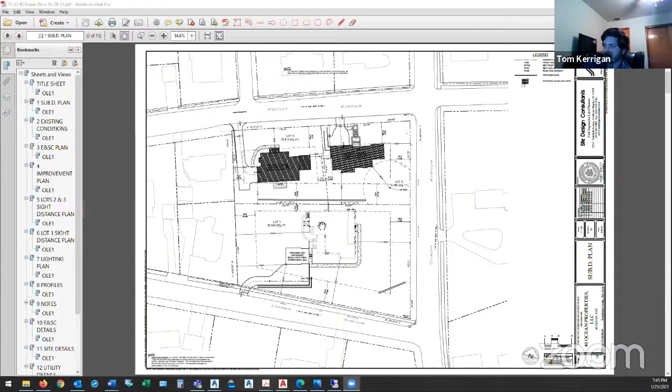As you can see, all of the setbacks for each of the lots are provided. This is the existing conditions of the property. The existing driveway and the existing garage are proposed to be removed so that we can construct the houses on lots 2 and 3, which are the 2 new residences. Lot 2, which is this lot here, will utilize the existing driveway access point that comes off Walnut Avenue.

As you can see, we've provided an erosion sediment control plan that extensively addresses any concerns of runoff leaving the site. There is silt fencing shown down slope of all disturbances. Construction entrances are provided for each lot. And all stockpiles are shown to be stabilized.

As I mentioned earlier, there is currently no stormwater for the existing residence or any of the impervious areas on 40 Ocean Avenue. We are now providing for each of the new residences stormwater management practices, and for the new garage and the new driveway, a stormwater management basin down near the intersection of Linden and Ocean Avenue.

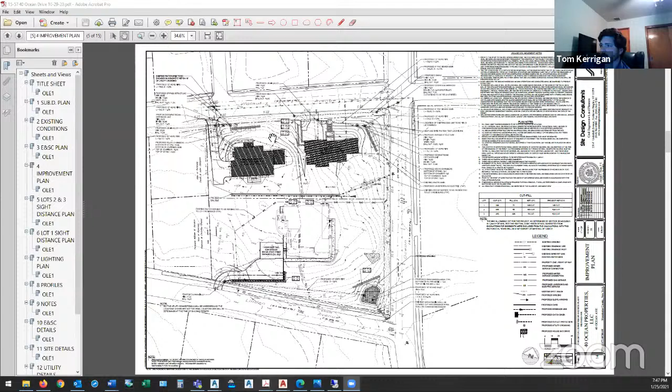We have done, to the best of our ability and due to the limitations of the code, reduced the amount of grading required for this site. As you can see, we limited the grading within this 40-foot radius of this beech tree to make sure that the roots were not disturbed as a result of the project. And also tried to reduce the amount of cut and fill necessary for the project. We currently meet the requirements of the code for this.

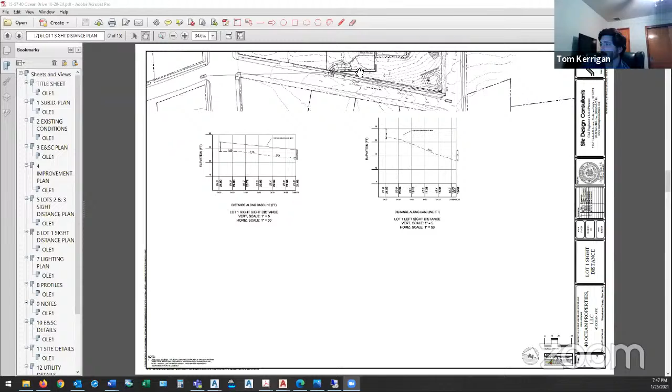Adequate sight distances are provided along Walnut Avenue for lots 1 and 2, as well as along Linden Avenue for lot 1 at the new proposed driveway access point. I noticed quite a few gradient lines on your plans. What does each line represent on that? 1 foot or 2 feet or what? 1 foot. It was requested of us by the village consulting engineer that we show it at this level of detail.

Okay, and your mains, I assume your electrical is going to be buried, and where do you propose to bring your utilities into the houses, the two new houses? So for the sewer for lots 2 and 3, we will be constructing an extension of the sewer that comes up along the right of way along Walnut Avenue, and it will tie into the existing sewer main located in Ocean Avenue. The water services will be pulled from the water main in Walnut Avenue and the water main in Ocean Avenue.

And as you say, electric will be coming off of utility poles and run underground to the proposed residences. We'll also be relocating the water service for the existing house. Currently, it comes off of Ocean, almost directly underneath the beech tree, and into the side of the building over here. We will be utilizing an existing connection off of Linden and connecting it around the side of the property to the same meter point. Presumably you will just abandon the service line that runs under the tree then, rather than trying to dig that up. Exactly, yes.

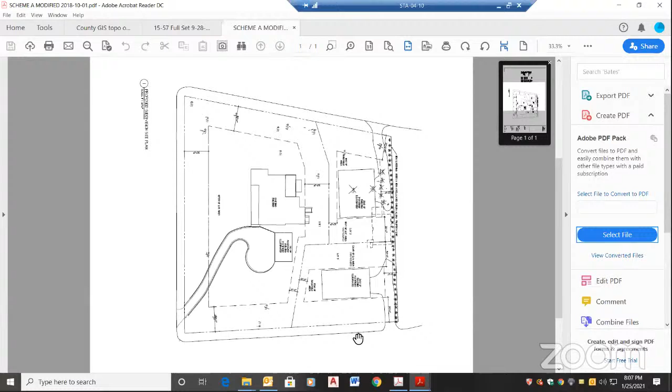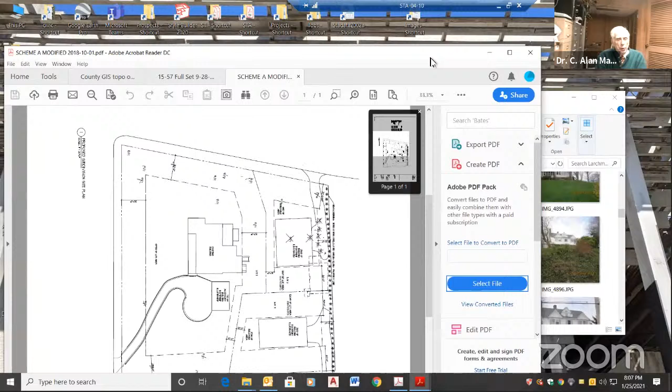Well, thank you. We appreciate that. And unless, Liz, do we have anyone else? Then I think what we probably should do is close this portion of the hearing tonight, and we'll work on our letter to the planning board. Mr. Chairman, I would love the opportunity to respond. I think a number of the things that were said are not correct or misleading. We'll be happy to hear the applicant, but once again, I've asked him to be brief. Sure.

We did see a version of these plans when there were negotiations going on. They were analyzed for zoning compliance with our engineer, and there were all kinds of problems. Number two, preserving a house like this and hoping it to have value and to sell it so that this remains a viable development in the future. No one's going to buy this house with another home in the backyard. This plan makes no sense at all. The other plan gives it room, leaves it to breathe. Number three, we are going to the Architectural Review Board. We're going, as you know, for site plan approval.

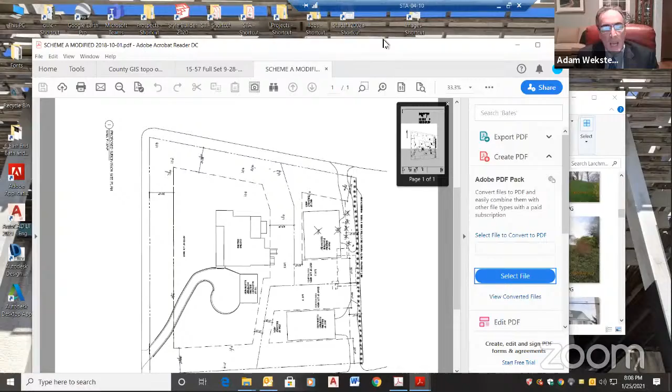I don't believe that the neighbors on Walnut, who are the ones who are, to use the technical legal term, making the most noise, have the ability to say, we don't want two houses on our street, we want them elsewhere because that's what we want. We're showing it doesn't interfere with the views. Mr. Tilley quoted a policy in your local waterfront revitalization plan in a way that was completely misleading. What your plan says under policy 25 is that the views should be preserved from the end of Walnut and Bay Street. That's all the way over by the water on the other side of Ocean Avenue. We're not talking about houses that are across the street from us on Walnut. And you can read that yourself.

The tree. I don't know to what extent you want to go into that, but both the Preserve Larchmont's expert and the expert for the town told us they wanted to see a bunch of preservation measures. We have agreed to do all of them, and there are conceptual plans that have been submitted to that effect. But we haven't even gotten a negative declaration or gone to the zoning board for variances we need. So we're nowhere near getting an approval for the subdivision yet. I do think that the board already has what it needs, but to the extent it has an issue, we will submit them and we'll comply with all the recommendations that in fact have been made.

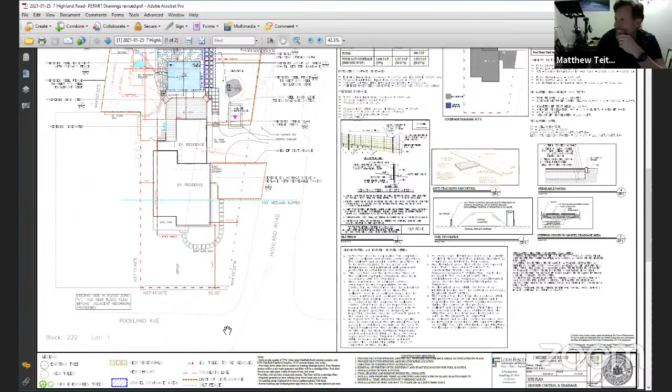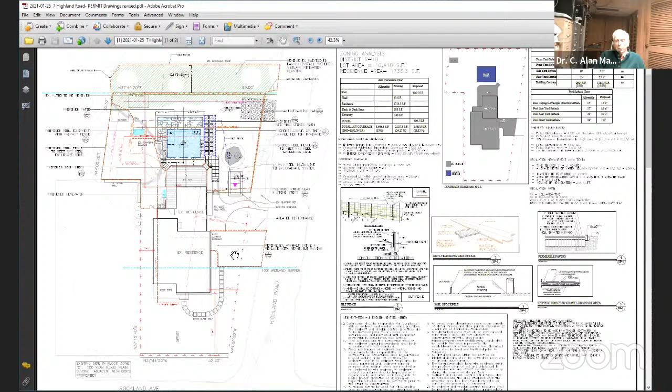Yes, and as mentioned, we're mitigating the stormwater in this area by removing and replacing the asphalt driveway with permeable paving. And so we are coming up with a net decrease in impervious surface. Okay, we will attach this. Do you have anything with the planning board? Are you on their schedule this next meeting? Yes, we are on their February meeting, and we'll be presenting this application to them. So any comments or feedback you do have would be greatly appreciated prior to that meeting. It sounds, generally speaking, that the scope looks okay, with discussion on plant material with Liz.

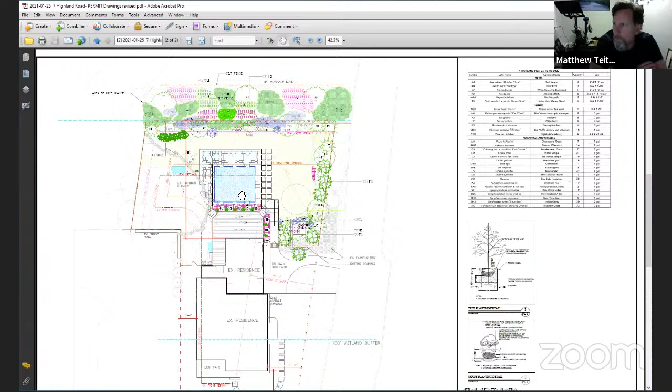Just looking at the plan, looks like there's a rock ledge cutting across the corner of the pool closest to the house. Yep. What's the plan to deal with that? We have a shallow pool. The full depth is 5 feet, so we're about 3 feet less than a typical pool at 8, and so that is hopefully helping. Due to the grades in this area, this will be lifted as well. We've done some initial probes, with the low end being on the ledge side and the deep end of 5 feet being a little farther away. So we're hoping for the best, and we'll adjust and accommodate as necessary. Okay, but it's small potatoes, relatively speaking, because you're lifting it and it's a shallow pool. Exactly.

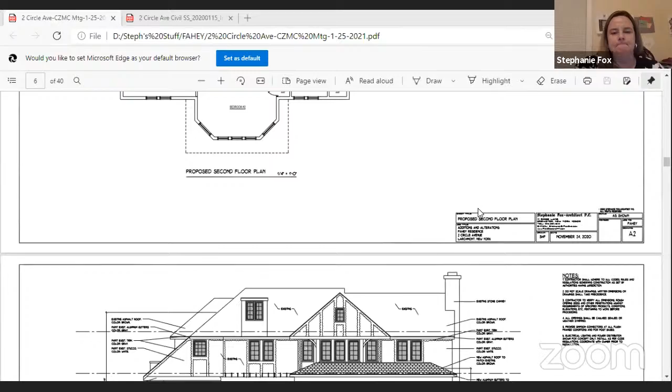Some things to note is that we have a full stormwater treatment plan in effect that has been reviewed by the village engineering consultant, and we have made modifications to the stormwater plan based on some comments from the engineering consultant. And as of last week, all of the comments have been addressed, and there's no further comment from the engineering

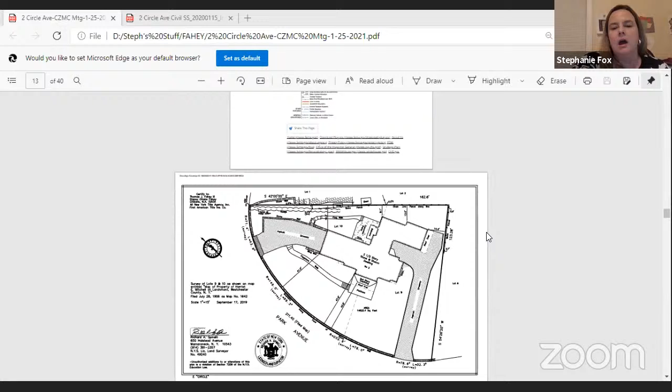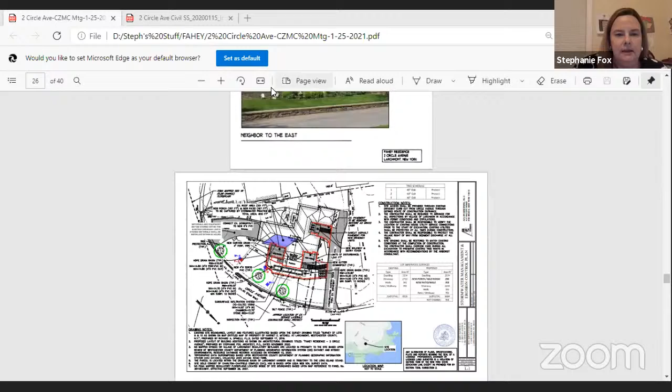consultant. It should be noted that of the new areas being added, only 358 square feet of new impervious area are going to be added, and it will be 100% mitigated with the stormwater system that we are proposing. What is the stormwater system that you're proposing? It's going to be four 100 HD, hang on, I can zoom in, Cultec units. Now the 100 HD Cultec units are the lowest profile units.

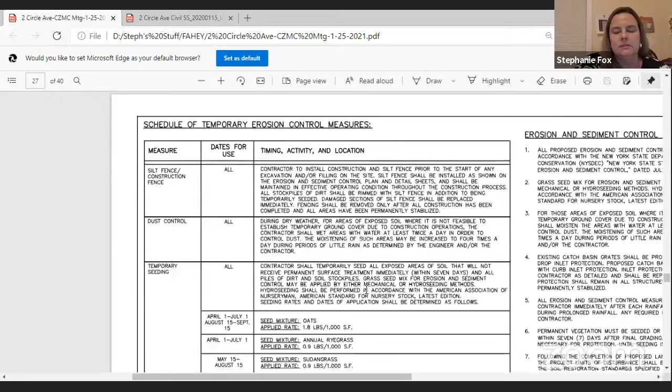So here's the engineering site plan. Here we have the front of the home, and there's going to be the four units here. One of the comments from the engineering consultant was a concern about the units' proximity to the existing trees that we have here. As a result, we had an arborist come out and take a look at the property. He did make some suggestions as to doing some pneumatic excavating for the roots, but, this is the report from the arborist, he did not think that any of the installation of the stormwater system or the proposed structures were going to have any impact on those 3 existing trees.

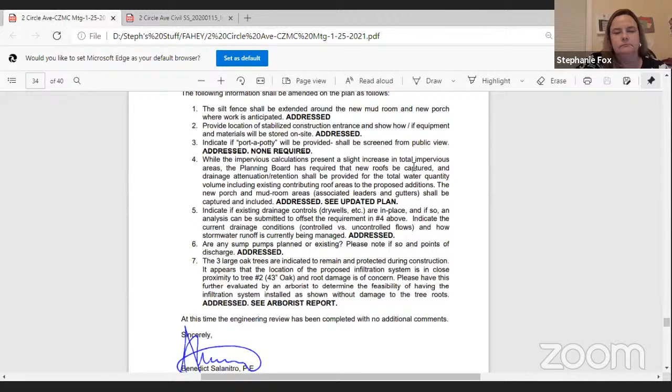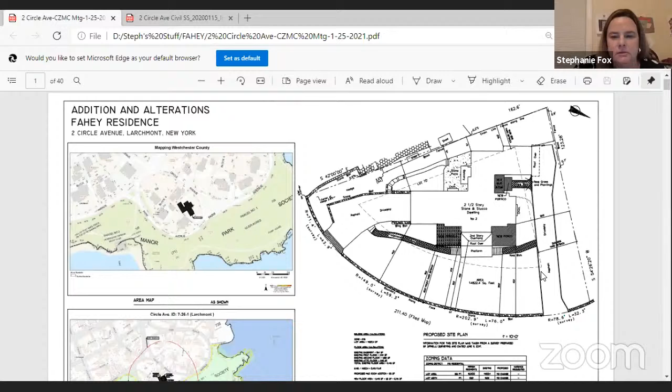And just so you can see, there were no comments other than engineering comments from the planning board. This is just the memo that shows that all items have been addressed. And I'll go back up. Mr. Salanitro is not here tonight? No, he's a consultant to the planning board. Oh, okay. Yeah, he's the engineer. We had our own separate engineer prepare stormwater mitigation plans, and Mr. Salanitro is the consultant to the planning board who reviews the engineering plans we submitted for the stormwater mitigation. Okay.

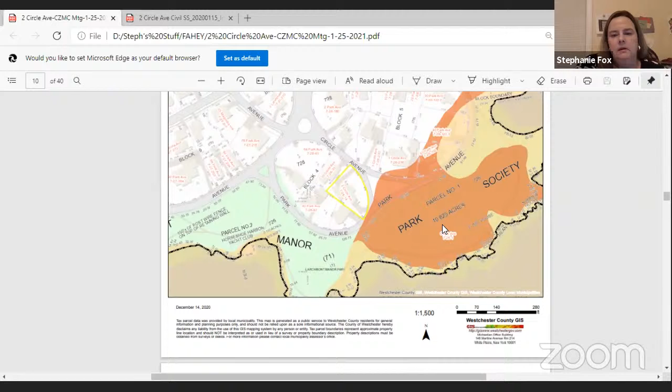Go ahead. Just a couple of other quick things to note. Let me scroll quickly, so I apologize if I'm making you dizzy. Here we have the flood zone map. This yellow triangle-type property is Two Circle Avenue, and you can see that we're beyond the flood stage or the hurricane stage map here. Same goes for the FEMA map. You can see we are in Zone X. We're not in any flood zone whatsoever, although there is proximity, obviously, to the coast.

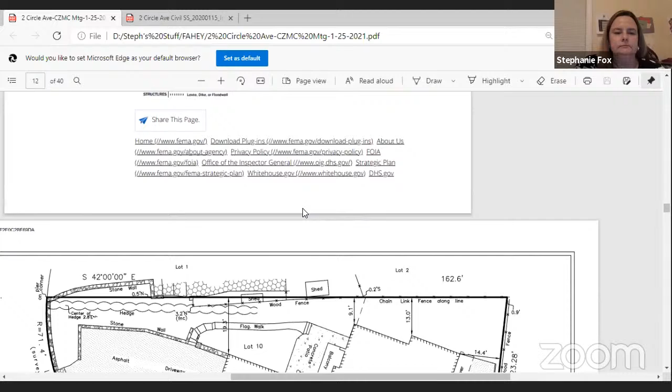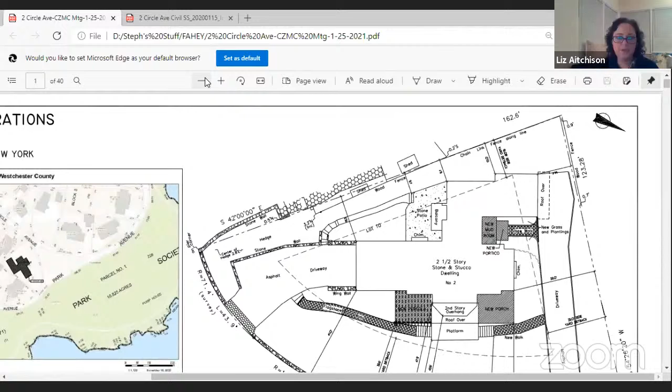Liz, do we have all of these plans submitted? Do we have copies of all of this? Yes, we do. Okay. Anyone else have anything they want to say? Anyone want to speak up on this? No? Okay. All right. Thank you.

I just wanted to say that we too will be in front of the planning board for the February meeting. So if you could find time in your agenda to make your recommendations prior to that meeting so that we can move forward with the review process. All other items have been addressed, and the CZMC review was the only outstanding item for our planning board review. Yeah, that's going to be tight. But we understand your situation. Okay, thank you.

I'm sorry, but we're not the February 1st meeting. You realize that 40 Ocean has a special meeting on February 1st. You're the regular meeting? Yes, we're the regular meeting, which is February 16th. That should be doable. Thank you. I'm glad you clarified that. Okay, thank you.

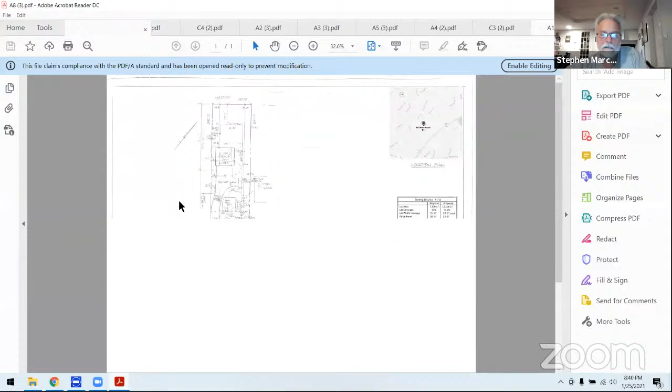Your computer looks as cluttered as mine. Yeah, I'm a little, oh, there we go. You see that? Yep. Oh, good. I always manage to screw it up. Okay, let me find the right page.

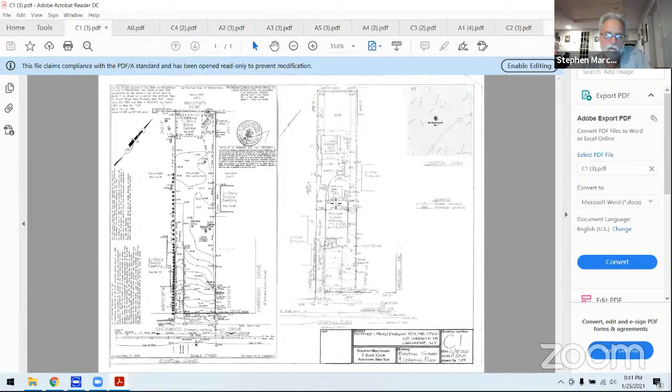Okay, this is it. We have an existing lot that has an existing garage and an existing driveway. We're proposing to remove the existing garage and have a one-family residence and a detached two-car garage here. When you say you have a garage and a driveway, am I to understand that that means there's no house there? Correct. Okay.

Could you explain why you have a garage and a driveway but no house? I can't, other than it was there for quite a while. Yeah, I was hoping to get a clarification on that because I'm aware of the lot. Okay, what's your plan? Okay, let me find the next.

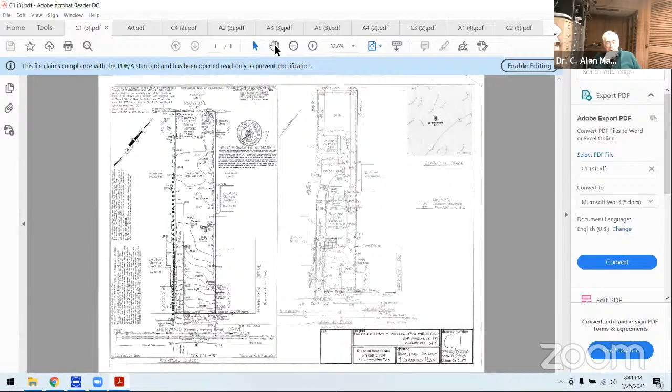Okay, so we had a perc test done. We had an engineer do our stormwater management to contain the water on the site. We're also going to add some pervious surface at the end of the existing driveway to help mitigate that runoff from the existing driveway. Also,

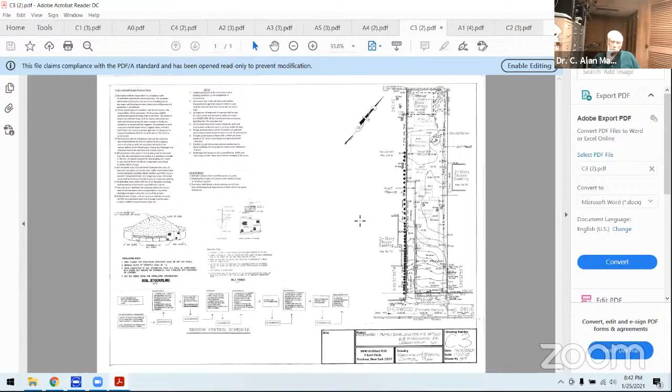Is this lot kind of unusual in shape? Is it a very long, narrow lot, or what's the story? Yeah, it's an existing non-conforming lot in terms of the size of it, the width. And what's your coverage going to be? We're going to meet the zoning, the coverage, which will be, I'll tell you in a second. 35% is the coverage.

We're at 34.4. That was part of the reason we got rid of the existing garage, because trying to keep the garage and extend the driveway put us way over the coverage. So we eliminated that and put a new detached garage, which is also smaller than the existing garage, to make that work.

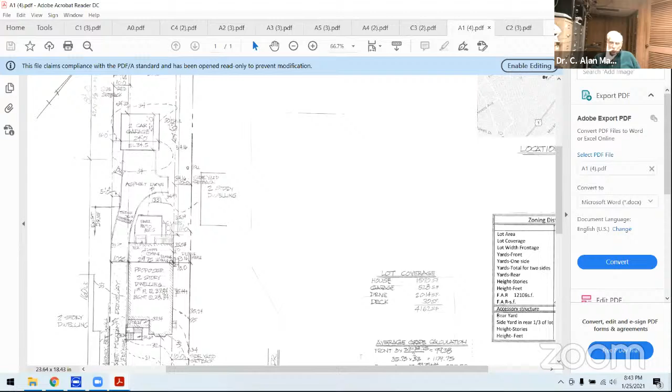And the architecture on this is what? I mean, it looks like a railroad flat, actually. It's, hold on, that's the wrong one. That's the site. Yeah, this is the front of the house here. We have a little porch in the front here, steps down to the driveway. That's the back of the house. So presumably the one on the left is the front and the other one is the back? Correct. Yep. And the sides, okay.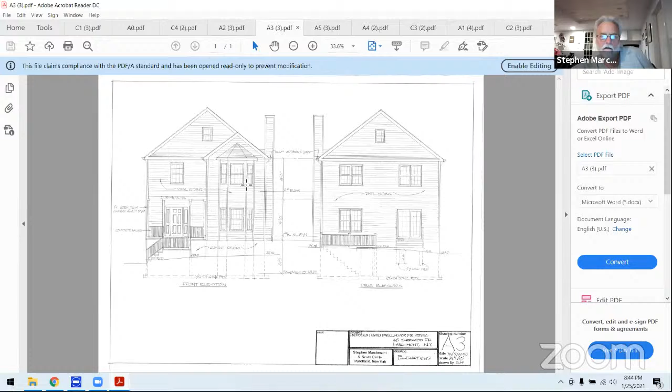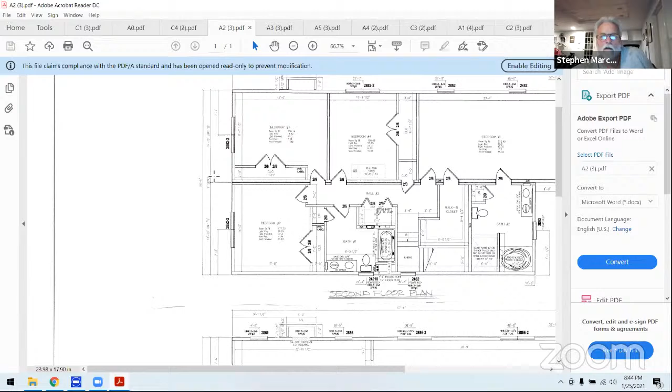And what is the bedrooms, bathrooms, et cetera? Yeah, over here. It's a 4-bedroom house and 2.5 bath. No problems getting hookups and all that from Con Edison? No, the water is existing, and there's an existing valve in the curb. And we have, how about gas?

Gas, I'm not sure about, to be honest with you. I know it had a moratorium. I don't think there's gas on the site right now anyway. All right, so you're digging in and hoping for the best on all of that. I get you. Right. Well, there is gas in the street. The question is whether we can hook up or not. Yeah, I understand.

Liz, is there anything as far as plantings or anything we're concerned about here? Well, I'd asked the applicant to add tree protection to the plan for a large tree in the back quarter or third of the lot. Oh, yeah, here. Yes. Right, tree protection. What's the condition of the trees? Looked in pretty decent shape. I didn't really evaluate it, but it's not shedding at this point, huh? No. Okay. All right.

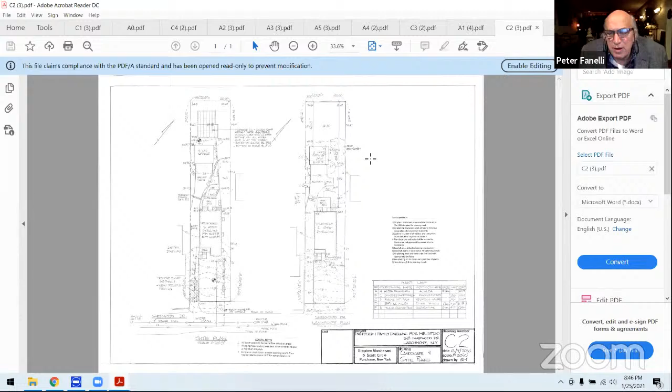Stephen, quick question. Any issues with flooding? No, it's high and it slopes to the front of the property. So I have a question. You have all the Cultecs in the back of the property. What kind of stormwater are they collecting, considering the slope? Well, they're collecting the house, the garage, and the new driveway.

Okay, because I don't know if you noticed, but the driveway that's right in front of your driveway is being raised. Which one? The house right in front of yours. Oh, across the street, you mean? Yes. So I would suggest that maybe there is a better way to catch the water coming down from the driveway. The house next door, I believe is 72 or 70, has a very long driveway. And when it rains, you can see the water coming down.

Right. The concern is that you don't want to impact the house across the street. Right. Well, I think that's why the town engineer consultant recommended that we put a pervious pavement at the end of the driveway to help mitigate that, which we incorporated here. The concern is the maintenance of those pervious pavers, right? They're efficient for a few years, but they tend to clog. And after that's clogged, there's no maintenance.

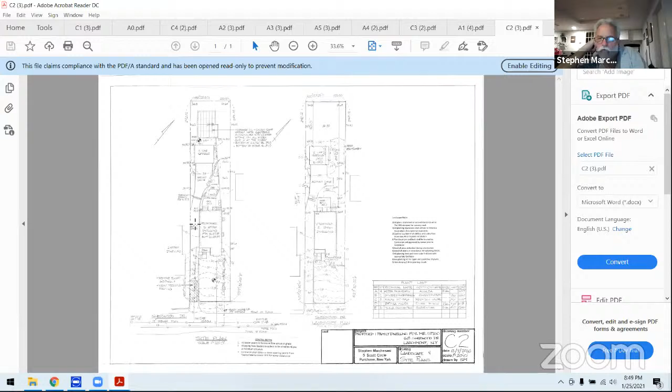Maybe some of that water, there's a catch basin right across from the street, maybe. Something to think about. Right. Yeah, that's a question if the town allows us to do that, and I'm not sure. Yeah. Occasionally you see it, sometimes you don't. Yeah, right. I'd have to find that for you. Yeah, you'd have to find out on that. And also if it's on the other side of the street, then you've got to open the street up, because you can't just dump it in the street and let it flow across. Otherwise it'll freeze in the wintertime.

Right. This street dead ends to a low point too, right? I don't know if it dead ends at a low point. It's running downhill. Where Staples is. I'm sorry, say it again. At the very end of that street, we're over by the Staples over there and behind the car wash. And if I recall, the end of that street is a low point, right? Everything else around it is much higher. Higher, yes. I'm not sure about the runoff or how the sewers collect over there or where they ultimately feed to. Obviously, the storm drains just go right to the Sound.

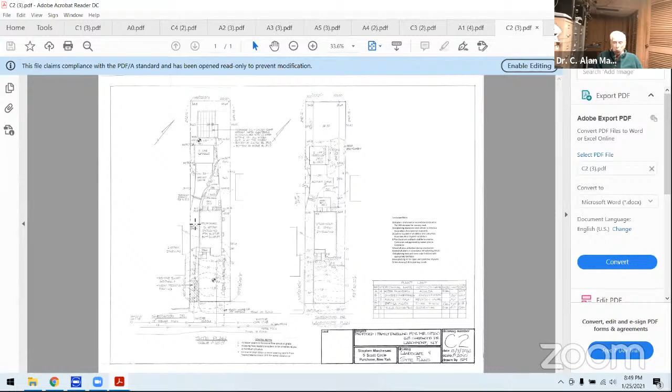Right. Well, strangely there is some form of a drainage, cut drain, whatever you want to call it, in the back of the property. I haven't figured out what that does, but it's in the back of the lot, right behind your garage, right? Yes, right. That's where the Cultec would be located. So 16 of those 100s. Right, the shallower ones. Now, I was just wondering if you could maybe distribute the Cultec so that you can redirect some of the flow from the driveway, from the front, into those Cultec. Right. Well, we're basically catching anything new, and the existing driveway is the part that's running towards the street.

So you're reducing runoff from the site, you're saying? Well, we're trying to help mitigate a little bit by doing some pervious surface at the end, to collect some of the existing driveway, which right now just runs down the street. Right. Just looking at the property, from the street to the front of the property there's a decent little grade to it. But after that, does the property level out? Yeah, it's pretty flat on top. Okay. That's what I was just looking at.

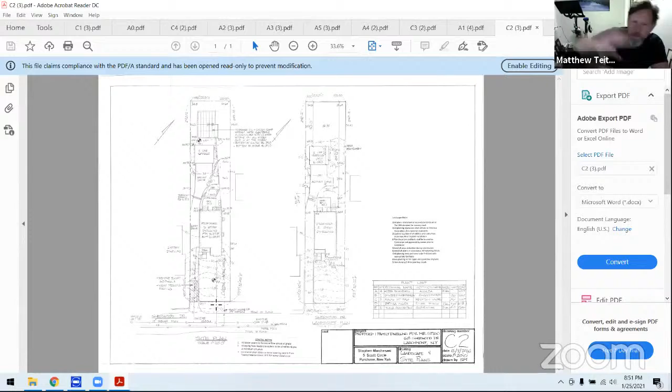We were thinking of a steeper hill, because when you look at the images from the street, it's all wood and you can't really see much. But after the front of the property, it looks like the front of the house is at about 33 feet, and the back of the property is at 34 feet. Correct. So, Mauricio, to your question about the Cultec, I could see how they could work back there. Right. From the front of the house to the street is the steep part of the lot, and that's pretty level in here. You have a retaining wall that keeps the property flat, a retaining wall across the front and up the driveway.

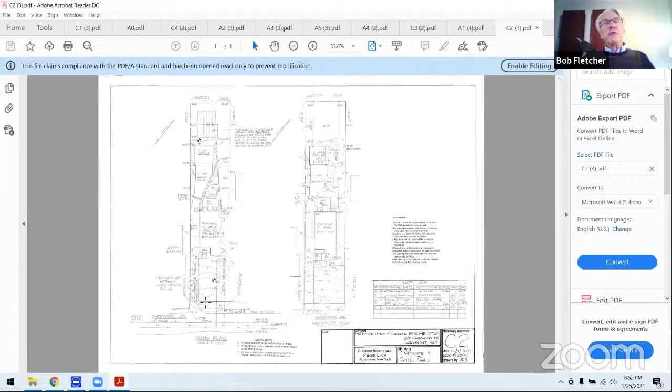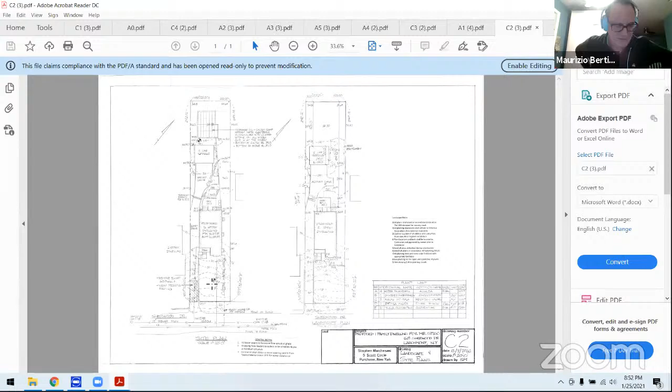Wouldn't it be practical to cut a drain across the driveway near the street and direct that water to a Cultec unit that could be placed there? Well, the problem is when they did the test pit, there was ledge right there, only approximately 2 feet down. So you really can't get it in. You're gonna have a lot of rock there. Oh yeah. Okay, thank you. And just by experience, I know that the house next door gets water in the basement. So maybe you want to put a little bit more than those sumps in your basement. Right.

Okay, thank you. Appreciate it. And will you be at the later February meeting at the planning board? The 16th. Yeah. Do you need any variance for the lot? No? So you're good? Yeah, we meet all the zoning. Excellent. Okay, thank you very much. Appreciate your submissions. And we should be able to deal with that for the 16th. I appreciate it. Okay, thanks.

The last item on the agenda is 151 Rockingstone Avenue, Town of Mamaroneck, a new single-family house. Liz, would you promote the people involved, if you would? Yep. Eliot.

Eliot Senor. Mr. Senor, we don't see you. We only see your name. No, sorry. My video's not working. I don't know why. Have you got it turned on? Start video. Let's try that. There we go. There you go. Now we see. Good evening. Sorry for the late night. I guess you've been here for a while.

So what we have here is a proposed building on an existing lot at 151 Rockingstone. We're on the corner of, let me share my screen, I guess. Can I share? That's a demolition, am I correct? It's a demo of an existing house, yes. Okay. Let's increase this so I can see what I'm doing. Share. All right, if you could see this, this is the house. It's sort of surrounded on 3 sides by streets. We have Mountain Avenue, Rockingstone Avenue, and Wildwood Road here. We have an area map down in the corner.

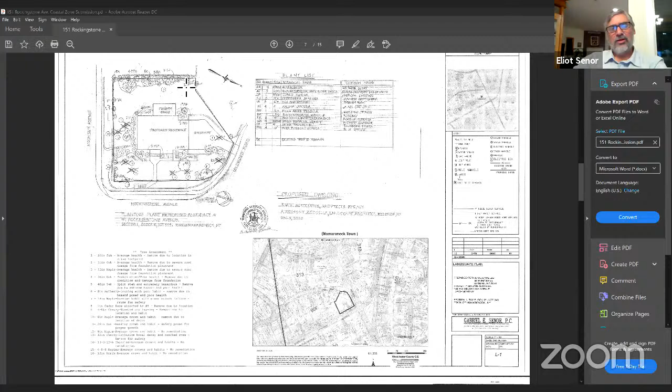This is a copy of the landscape plan that's provided by Anthony Acasella, and has quite a few additional plantings that we're doing in the property line between the neighbor's house and ours. We are providing a drainage system as required, underground Cultec in this area here, as well as some in this area here, Cultec, in this area for the driveway, mostly for the driveway. This is for the house. Right now, it's on top of a hill.

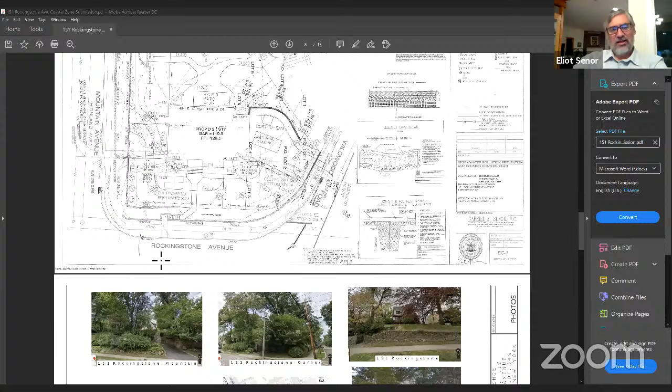This is our property here. This is the driveway off of Mountain Avenue. There is currently a tall wall. This is the neighboring property to the left on Mountain Avenue. It's a tall wall. It's in the right of way. And this is our corner. This is our driveway that we're going to be blocking back in and not using, so we're not backing out onto Rockingstone. Let's see, we have some other pictures here. This is the property across the street. It's a relatively new house on the corner of Wildwood and Rockingstone. And then this is on Chatsworth.

So if you were referring to photographs, they weren't showing up on my screen. Oh, all right. Yes, I was referring to photographs. It's the same PDF. So I was seeing them. No. Maybe you could scroll down or something. All right. Well, here is the existing house. Can you see that now? The driveway off of Mountain Avenue. No, I just see a plan. EC1 is what I see. Yeah, Eliot, it's updating for me. So I'm seeing everything you're referring to, all the pictures around the house. Yeah, I'm seeing it too. Okay. So then ignore my problem. Some computers are a little slower than others. I will leave this up here for a minute.

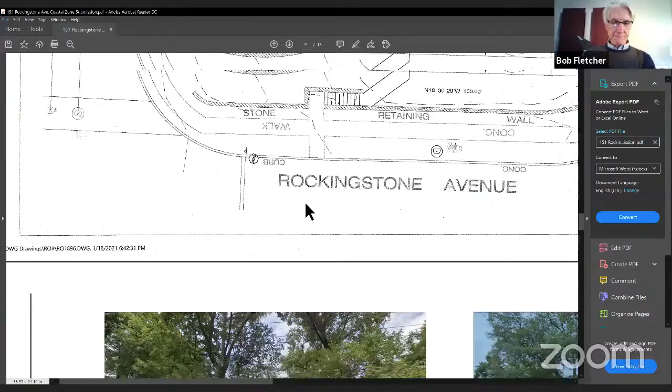So Elliot, as I said, we had an arborist look at all the trees on site, and we're saving the ones that Alyssa suggested to save as much as we can, and are taking down the ones that, in addition to others, one that she had suggested we look at and take down because it's in decay. You got a lot of stonework there. Is any of that being preserved? Or you're knocking that all down? No, all of the stonework around the entire property is being preserved. Let me go to my sketch here.

So right now there's a tiered retaining wall on Mountain, which is remaining. There is a double tiered wall on Rockingstone that's remaining. The area where the existing driveway is, we're going to block that in and match the existing. And then there's a small portion on Wildwood where our new driveway is going to go, which is the only wall that's going to come out, and that's maybe a foot or two high at that side.

Why do you want to move the driveway from Mountain to Wildwood? Well, the current driveway is very narrow, and it backs out right at the corner of Rockingstone and Mountain. And so we think that it's dangerous. By moving it off onto the less traveled roadway and farther from Rockingstone, we feel it's a better position.

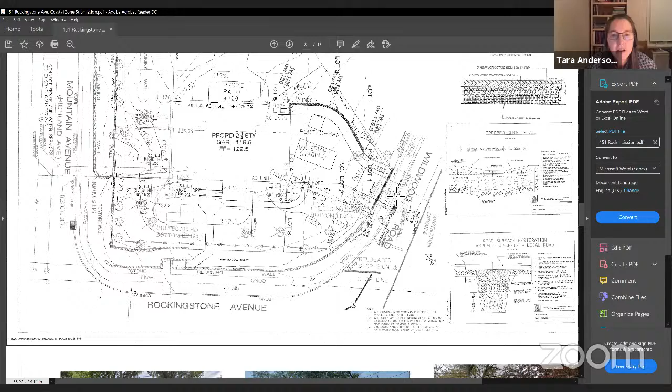It's very close to the neighboring house on Wildwood. The house on Wildwood is actually very far up the hill. Let's see. Oh, so that's just the line? Yeah, that's just the property line. The house is actually way up the hill, way back here. No, I mean the house on Wildwood. That's Mountain up that side. I mean the house on Wildwood. Let me go to this.

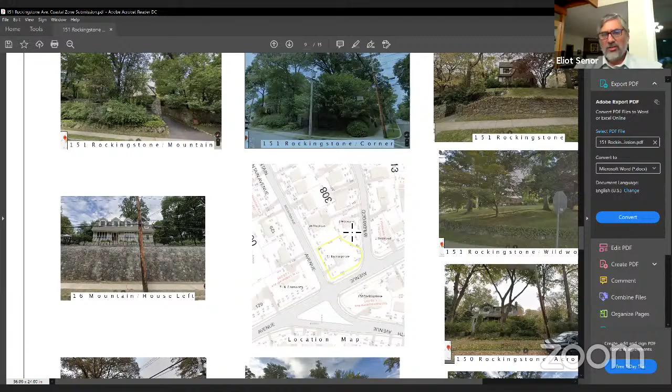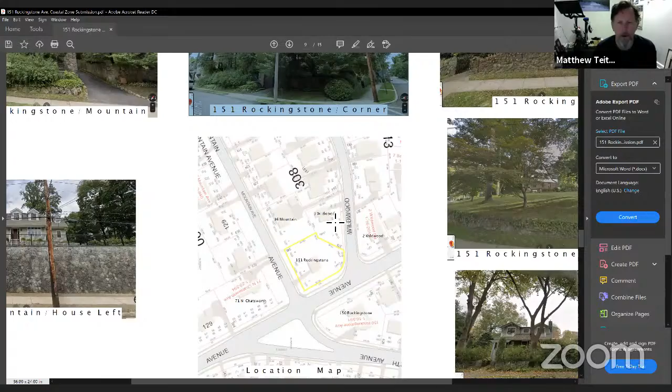So the house on Wildwood is here, can you see that area map? Yep. So our driveway is coming in here, which is not necessarily close to the house on Wildwood. I see. Yeah, if you look at the Google Street Map view, you see it's pretty wide open. It's pretty far away from the next house up the street on Wildwood. Find the picture of Wildwood. The existing driveway is really narrow. This is the picture of the house on Wildwood. That is our existing house, and our driveway is way to the left of the sidewalk because the line comes down at an angle.

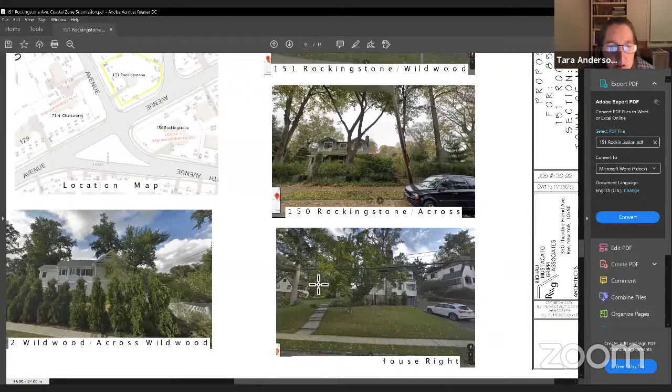So is that tree right there one of the trees to be removed? That large tree? No, that one's not on our property. Oh, okay. We actually have no trees coming down on that piece of dividing line. There's no trees there. There is one down close to the street line, but it's not that one in the picture. And the only tree that's there is not on our property, so we're not taking it down.

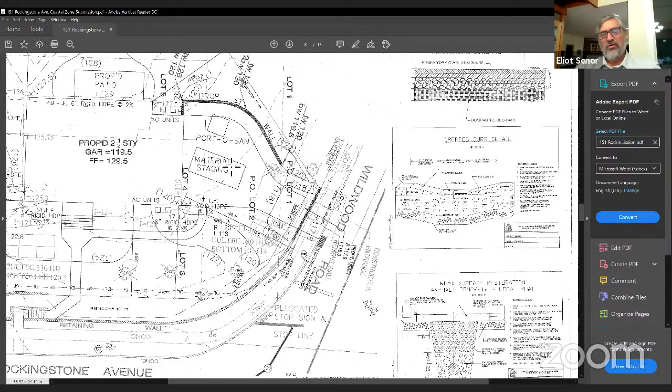It looks like a very sloped property. It is. That's the reason for all of these retaining walls, I suppose, and that's why we're coming in on Wildwood as well, because it's the area that's the least sloped. This is the current driveway, and if we were to put in a two-car garage here underneath the house, we'd have to take out a lot of this vegetation and excavate all the way down to that elevation.

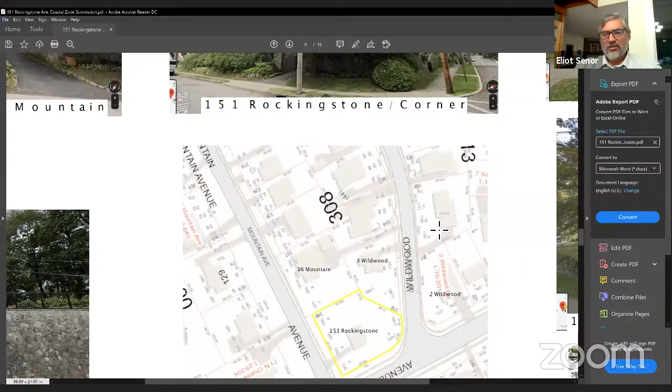By coming in on the other side, let's see. I guess this is the best picture. So this is our existing house. We're going to be coming in a little bit to the right of this picture. And so this is the most gentle slope. The part of the wall that we're going to be taking out is only 2 feet high. The wall on Mountain is a double tiered of probably 8 or 9 feet high altogether. So we felt this was least detrimental to the property as well.

So how many mature trees are being taken out? Let's go to the plan here. So we have 1, 2, 3, 4, 5, 6, 7, 8, 9, 10 trees coming out. Wow, that's a lot. They're not a lot. We're saving all the ones along the boundary line on Mountain, and a couple of existing on the corner of Rockingstone. So that one in the picture from a minute ago remains.

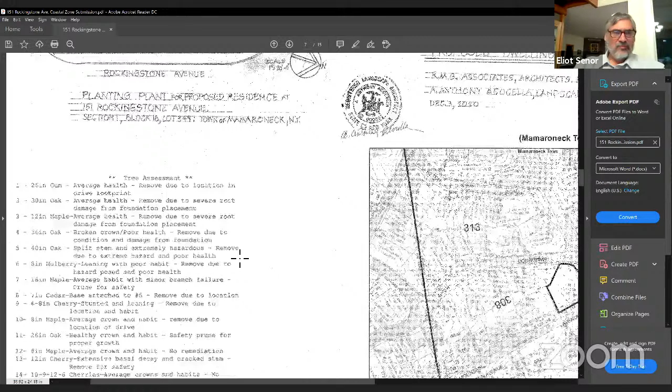So now, as far as the trees that are coming out, you can see what they're like. For instance, number 2, a 30-inch oak, has severe root damage, damage from the foundation placement. Tree number 2 is over here on Rockingstone. Tree number 3 is also severe root damage, I guess, from the proposed house. I'm just reading this. Removed due to extreme hazard and poor health, number 5, which is here in the middle of the lot towards Mountain Avenue.

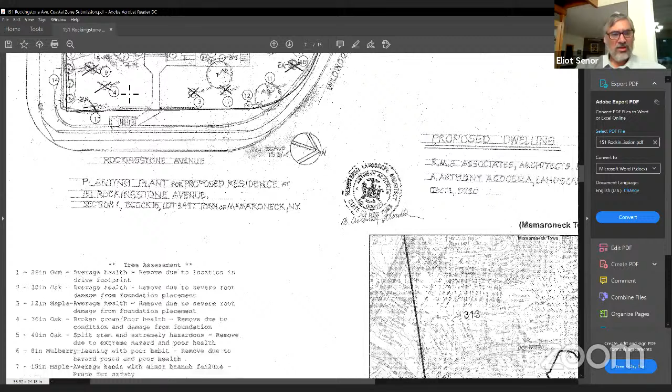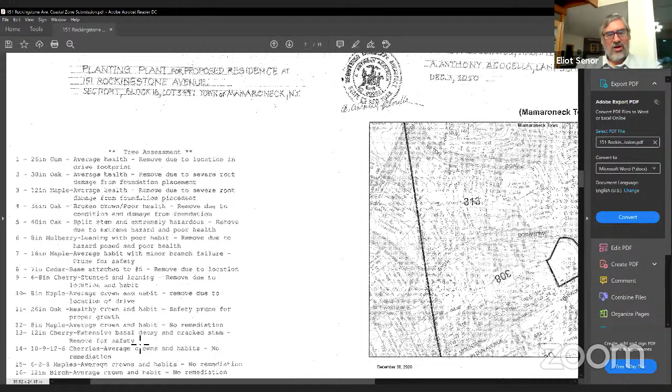Number 6 is hazard posed and poor health. So out of the trees that we're removing, maybe half of them are due to the house placement, and half are not in very good shape. This 26-inch oak needs to be pruned. We're saving it. The 12-inch cherry has basal decay and a cracked stem.

The cherries, average crowns and habits, no remediation. We're saving those. And we're saving these last couple of trees. So out of the trees that we're removing, half of them, I would say, are in poor health.

Yeah, but the plant list on the top, is that the plant to be planted? Yes. So this plant list here is the trees to be planted, yes. Yeah, because most of those are not trees. Most of those are shrubs. Mhm. Right, except I'm not the landscape architect. I leave that to experts. Yeah, I mean, those are mostly shrubs, right, Liz?

Well, you have, okay, the first two are trees. Azalea? No, Acer rubrum. Yeah, oh, okay, the first two, so two maples. First, there are two trees there. There's a dogwood, there's a holly, there's a weeping spruce.

Yeah, but the trees they're removing are, if we go back down to what they're removing, they're really big oak trees and, I mean, Kalmia latifolia, that's just mountain laurel, it's a shrub, rhododendron, that's a shrub, I see a lot of spirea, it's just a little shrub. We also have blue spruce there as well, and holly.

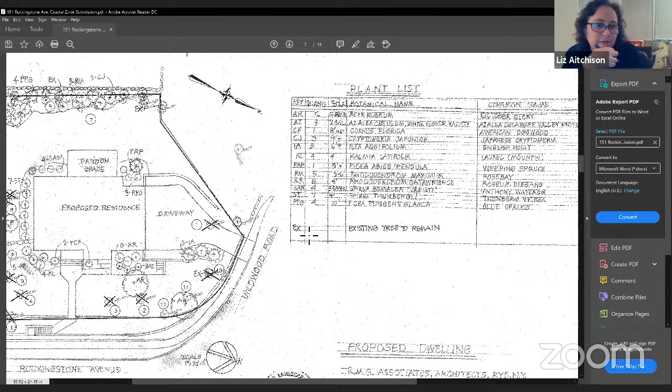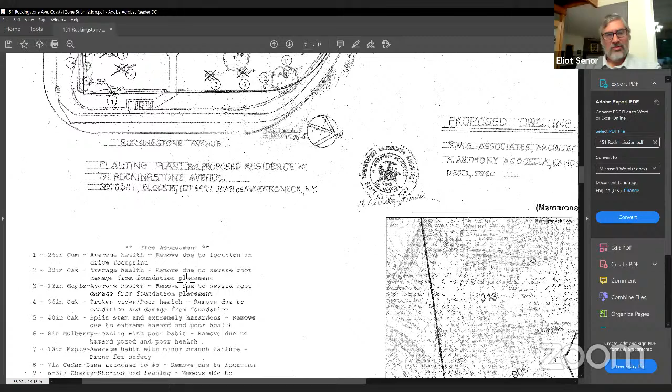Yeah, and Eliot, I thought you were going to try to save number 2 and 3 in the front. 2 and 3 over here. Yeah. I don't remember that. But I mean, we can mark them not to come out, but the arborist said that 2 and 3 were, location in the, severe root damage from the foundation. He feels that they're too close to the foundation. I don't see it. I see it as being far away, but I'm not the arborist, so I relied on what he said.

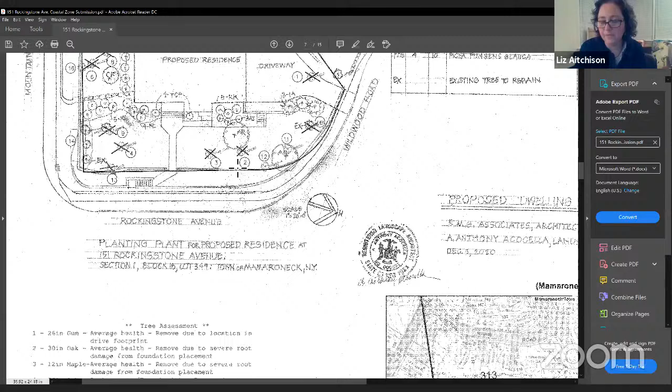Yeah, I don't see that being an issue with those two, but did you go back and revisit these trees with an arborist after the planning board meeting, or is this the assessment? No, we went back, because originally he just looked at the trees that we were taking down, and so we asked him to go back after the planning board meeting to look at all the trees because you had thought some of them, number 13 especially, you thought that they'd come down, and that's his answers for 2 and 3.

Look, if we can save them or show them not to come down, but if they are and have severe damage, then we can remove them later on. But I'm just relying on the arborist's call on that.

Maybe this is an ignorant question, but do people sometimes replace an oak with an oak, because the oaks obviously reach far greater proportions. And so in terms of shading of the neighborhoods, visual impact, you lose a couple large oaks, it's pretty significant. We can request that if we want, that we add some larger trees to the list.

I'm partial to. Is there a good depth of soil on this lot? Because if you encourage a big tree to grow and it doesn't have enough soil to be properly rooted, it's just going to fall over one day.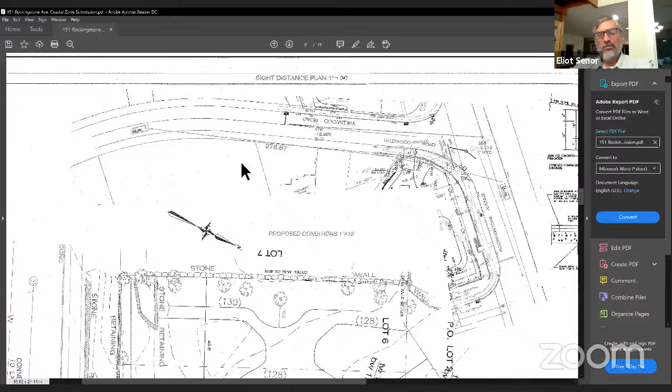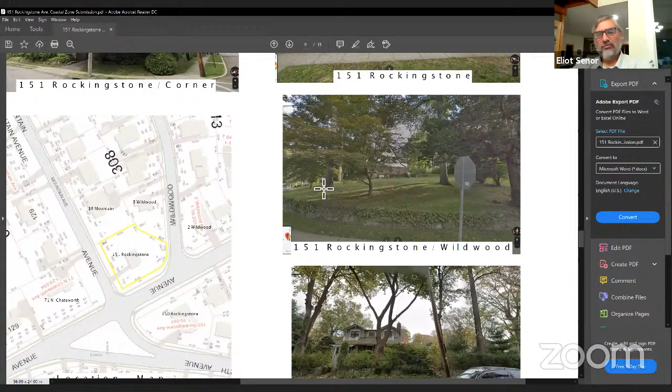you see this area in here where that's one of the oak trees that are coming down, and we can certainly plant something new that would not be damaged at this time from the foundation excavation. Actually, I think it's the tree there that's coming out, that this one's staying. It's this one back here that is coming out. Right. And we can certainly plant some more down closer to the road. What do you think about that, Tara?

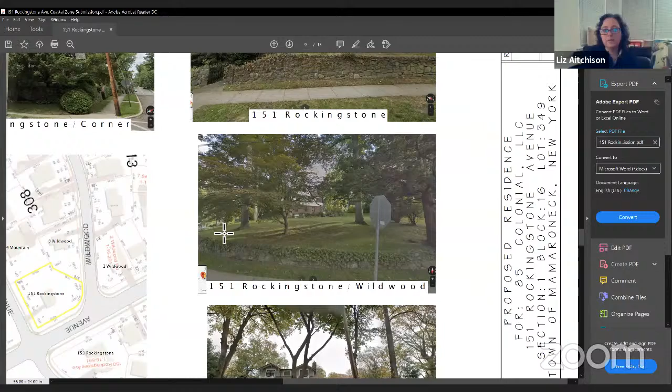Yeah. I mean, I noticed the old plant list and the new plant list, and it just seemed like the old plant list has some pretty significant trees, and the new plant list had some trees, definitely, some maple and a dogwood, but they just don't reach the same stature as some of those original oaks that are there, and so it really impacts the neighborhood in terms of shading and aesthetics. So yes, adding trees like that would be great. Mm-hmm.

Yeah, we don't really have any frontage on Wildwood to add any street trees there. And certainly on Mountain Avenue, we have that high retaining wall and I wouldn't want to add there. But I think we could add something more on the northerly side of Rockingstone. As you go toward the south, toward Mountain, the walls start getting high. But certainly in the area of this 30-inch oak that we're taking down, although we do have these two trees, these ARs, what is that?

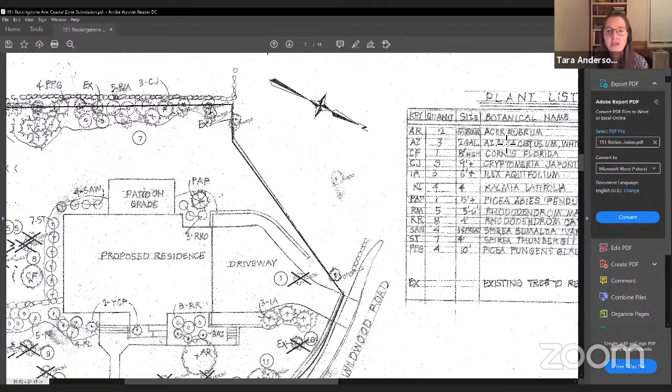Are those the... Those are the red maples. Red maples, yeah. No, I mean, red maples are great. It's just, rhododendron, spirea, it's not really comparable to the trees you're removing. Yeah, I think that the trees that we're planting are more for screening between neighbors and foundation plantings than street trees.

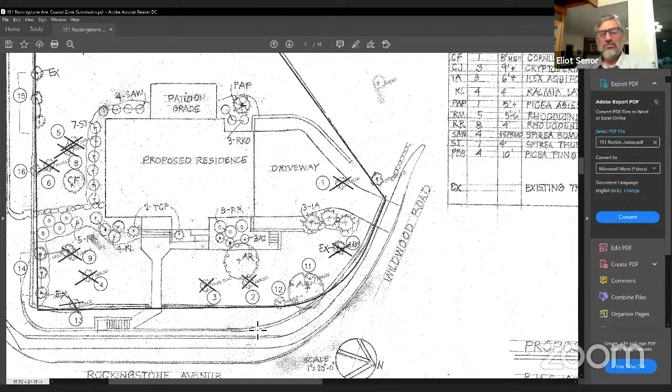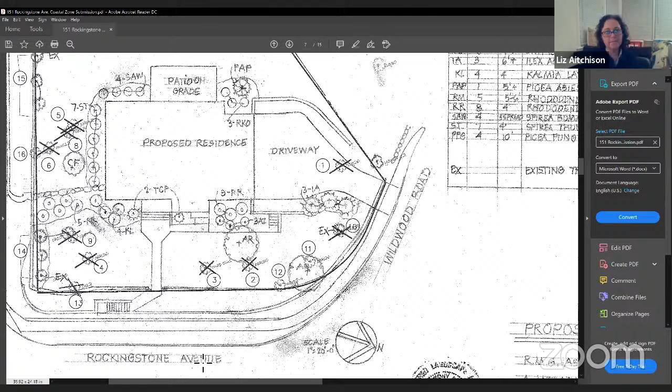So the reason that the town wants to have them take over some of the right of way is so that they'll be responsible for maintaining the retaining walls and the steps that are in the right of way right now. So to make it clear that it's part of that property and not the town's. Right. Oh, I see. So that retaining wall is currently owned by the town? No, it's on town property, but it's built by them. I see. By the original homeowner. Yeah. Original developer, it's hard to say who built these things, way back when the neighborhood was built.

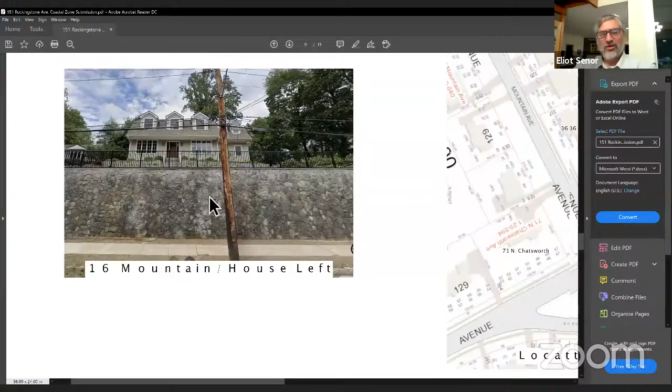But that's what we did with the house next door on Mountain. They had a gigantic retaining wall that they had to build to save their house, basically. Right. Then you see that's that retaining wall that was built, and of course, in order to build or rebuild that retaining wall, they had to take down all of the trees that were up against it because those trees add weight. Again, I don't think we can really do much on the Mountain Avenue side. You're just saying that there's not much room for street trees there? Right.

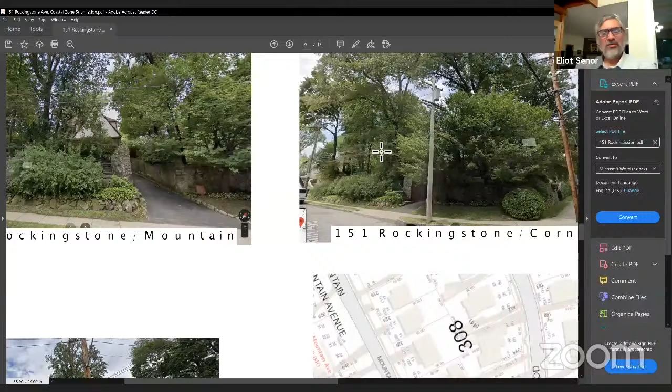This is the view of our property from Mountain Avenue, and all of these trees essentially are staying. I think there's some recommendation that a couple of them come out. Certainly on the corner in here, there was a cherry that is in bad shape, that's dangerous. But most of these other trees on this side are staying. So this is the plan. These three trees here are staying. And then certainly these trees here, there's 3 coming out on that side.

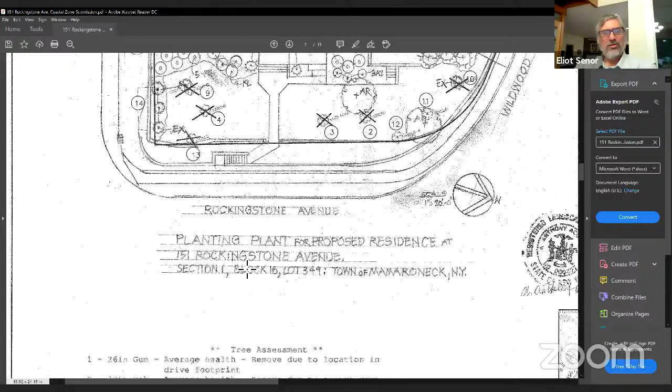Let's see what they have to say about its condition. 9, 4, and 13, or is it these 5, 8, and 6? 5 is extremely hazardous. It's a 40-inch oak in poor health. 8 is removed due to location, and 6 is poor habit, hazardous and poor condition. So 2 of the trees there are in hazardous or poor condition. The last one is location to the foundation. So that's these 3 trees here.

9, 4, and 13. 4 is a broken crown and poor health. So most of these big trees also seem to be in poor health, and they do have a life expectancy and a maturity, and replacing them with new trees that are able to grow, I think personally is better. But like I said, I'm not the expert.

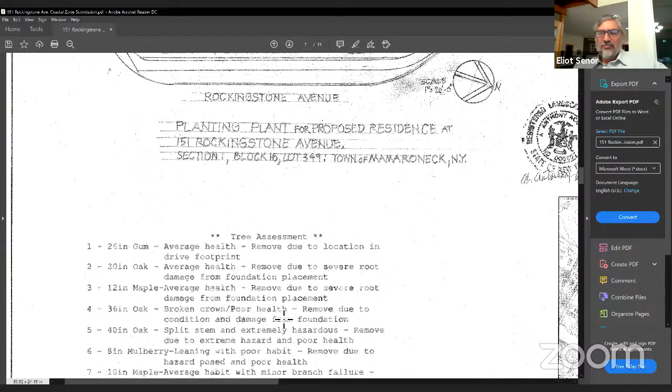I think a lot of these 70, 80, 100-year-old trees around here would all fit that bill. We got a lot of trees that are pretty tired and have come to the end of their cycle. I would agree with that.

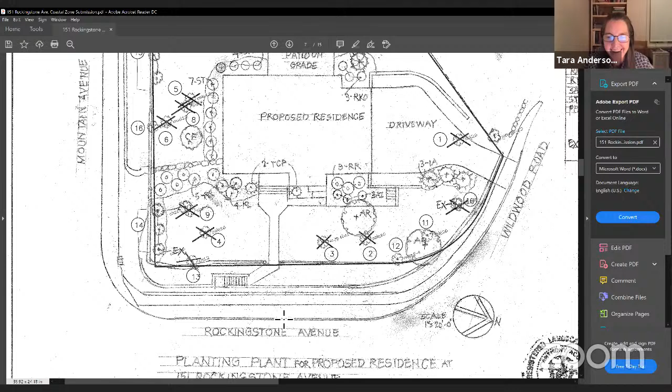Although, we're all getting old, right? Stop bragging. Much better than the alternative. Absolutely.

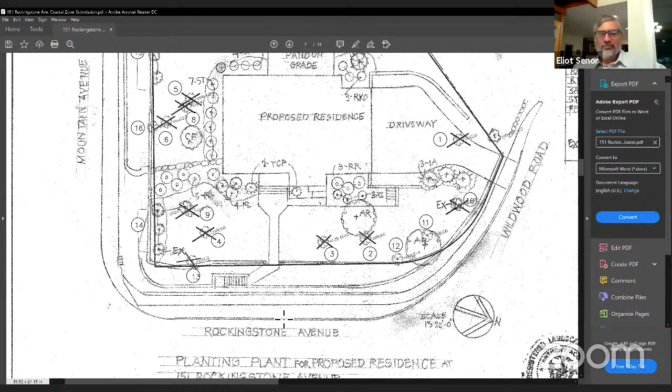I should look at Rockingstone and see if I can recommend to you a couple of trees to put there. Sure. I think we're agreeable to that, yes. Okay. Well, I guess we probably have exhausted the topic, and I think we've exhausted the evening. So does anyone have anything in the way of old business or new business?